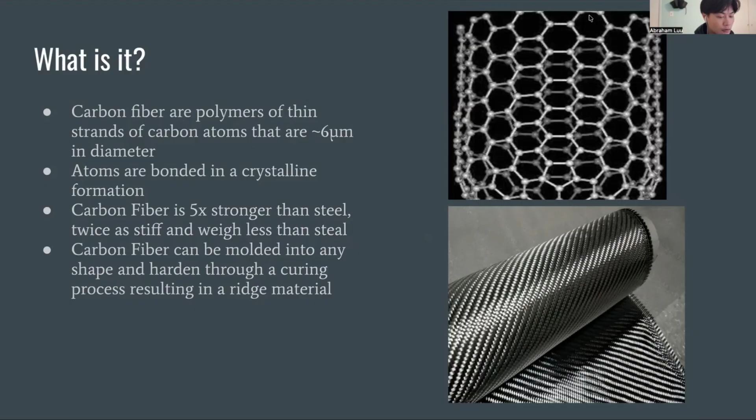Carbon fiber can be molded into any shape and can be hardened through a process called curing, resulting in a lightweight, rigid material. Additionally, carbon fiber undergoes additional treatments for specific requirements that can be combined with other hybrid composites that can form the durable materials that we know carbon fiber to be, especially for aircraft and other specialized industries.

The history of carbon fiber. In the 1800s, Joseph Swan would produce carbon fiber for the first time to be used in a light bulb. Thomas Edison would later adapt this technique in the incandescent light bulb by heating cottons or bamboo at high temperatures and carbonizing them into carbon fiber filaments.

In 1958, Roger Bacon would create a high-performance carbon fiber at Union Carbide by heating strands of rayon until they are carbonized. However, this process would soon be inefficient as the fibers only contain 20% of carbon. However, this would cause Dr. Akio Shindo in 1960 at the Agency of Industrial Science and Technology of Japan, using polyacrylonitrile or PAN, that his fibers would contain only 55% of carbon.

This would later be improved by Richard Millington of H.I. Thompson Fiberglass Co., and he would produce a 90% carbon fiber using rayon as a precursor with PAN fibers. These fibers are later used for our aircraft and vehicles and other industrial usages. In the 2000s, newer carbon fibers would contain 95% of carbon with an increased tensile strength and elasticity. Modern carbon fibers are mass-produced and are used for industrialization for their lightweight, durability, and strength, known to be stronger than steel.

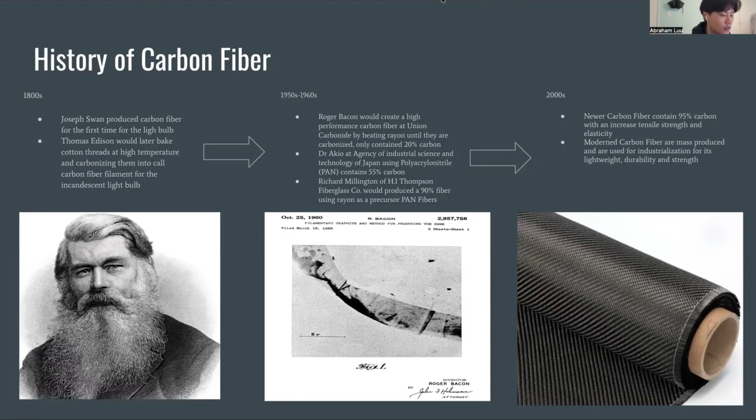Carbon fiber is produced by processing organic polymer raw materials known as precursors. There are mainly two types of precursors, PAN and petroleum pitch. There are other types of precursors like rayon, which was used in the earlier days. PAN-based carbon fiber is manufactured through five main steps: polymerization, spinning, thermal stabilization, carbonization, and surface treatment.

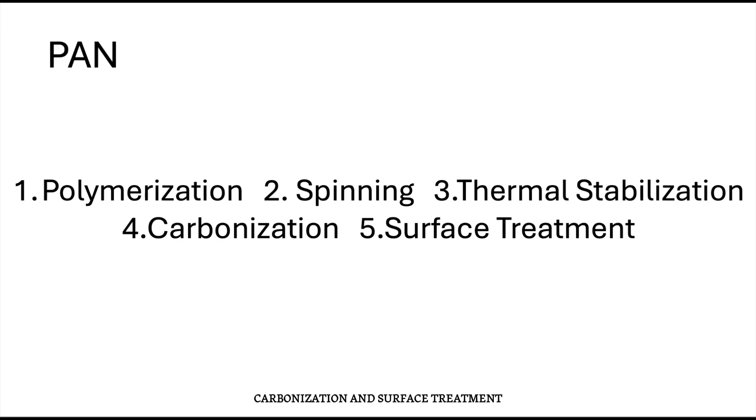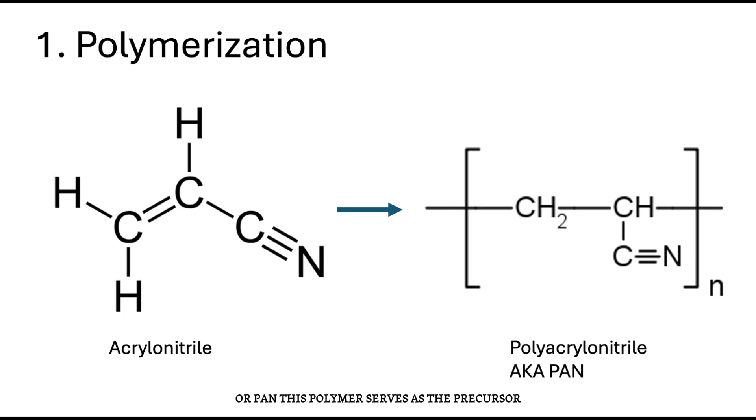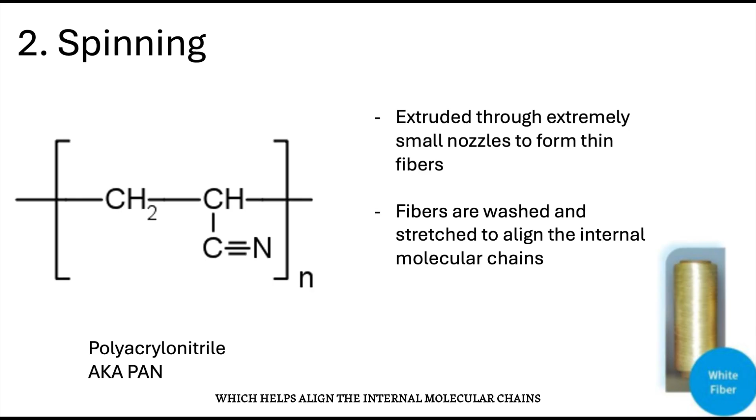First, acrylonitrile is mixed with the catalyst to produce a polymer called polyacrylonitrile, or PAN. This polymer serves as the precursor for the carbon fiber. Next is the spinning process. The polymer is extruded through extremely small nozzles to form thin fibers. Wet spinning is the most commonly used method. During this stage, the fibers are washed and stretched, which helps align the internal molecular chains and achieve the desired fiber diameter.

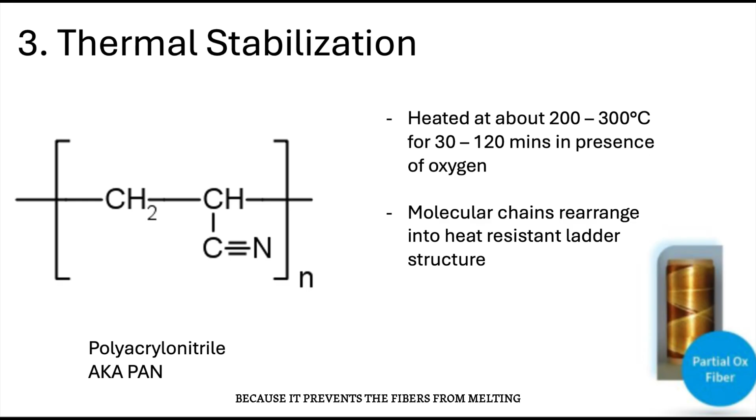The fibers then undergo thermal stabilization. They are heated at about 200 to 300 degrees Celsius for 30 to 120 minutes in the presence of oxygen. During this process, oxygen is absorbed and the linear molecular chains rearrange into a heat-resistant ladder structure. This step is important because it prevents the fibers from melting during the next high-temperature stage.

After stabilization, the fibers go through carbonization. They are heated to very high temperatures, typically between 1,000 and 3,000 degrees Celsius, in a nitrogen atmosphere. During this process, non-carbon atoms such as hydrogen, oxygen, and nitrogen are released as gases, leaving mostly carbon atoms behind. These remaining carbon atoms then bond together and form a crystalline structure that aligns parallel to the fiber axis. This alignment gives carbon fiber its high strength and stiffness.

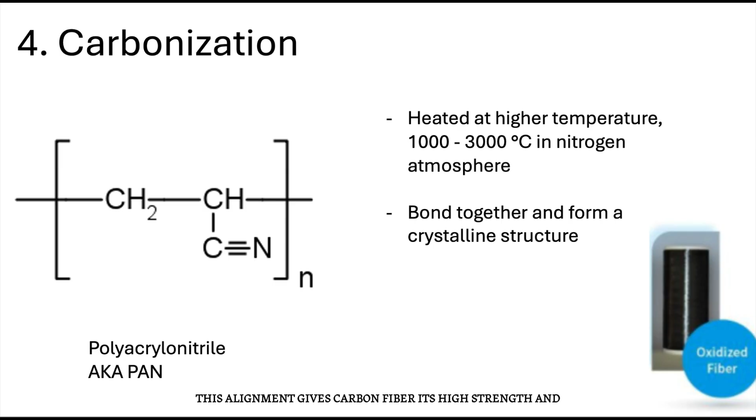Finally, the surface of the carbonized fibers is slightly oxidized to increase surface roughness and chemical reactivity. This improves the adhesion between the carbon fiber and resins such as epoxy when the fibers are used in composite materials.

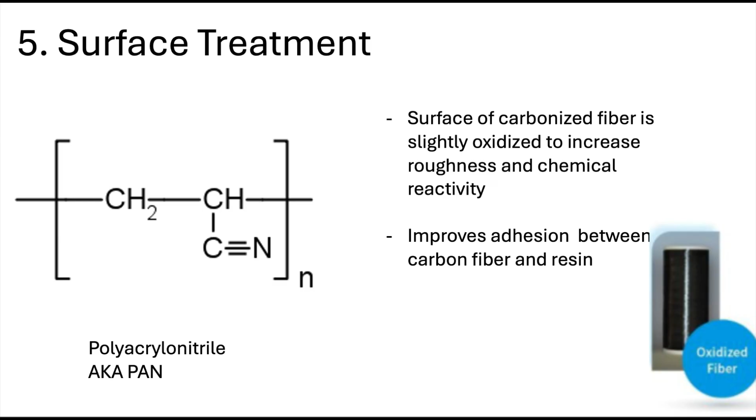Manufacturing pitch-based carbon fiber follows a slightly different process. It follows 5 main steps including pitch preparation, melt spinning, oxidative stabilization, carbonization, and surface treatment. Pitch-based carbon fiber production begins with the removal of impurities. Pitch, which is derived from petroleum or coal tar, contains solid particles and gel-like impurities. These impurities must be removed because they can reduce the tensile strength of the final carbon fiber.

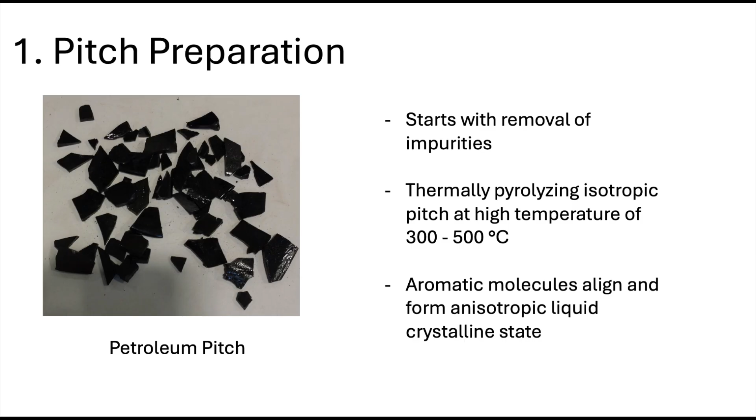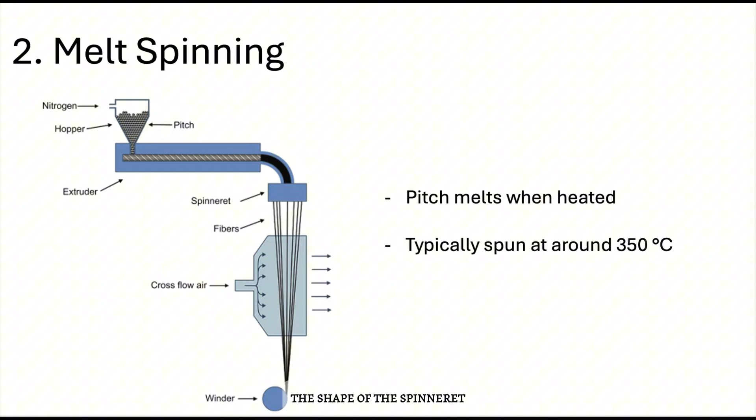After pitch is prepared, it goes through the spinning process. Since pitch melts when heated, melt spinning is used to form fibers. For mesophase pitch, fibers are typically spun continuously at around 350 degrees Celsius. The shape of the spinneret holes can also be adjusted to control the cross-sectional shapes of the fiber.

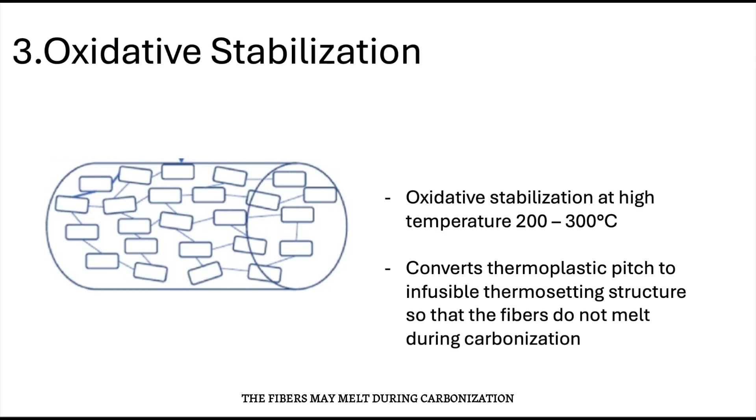Next, the fibers undergo oxidative stabilization at around 200 to 300 degrees Celsius. This step converts the thermoplastic pitch into an infusible thermosetting structure so that the fibers do not melt during carbonization. If stabilization is insufficient, the fibers may melt during carbonization, while excessive stabilization can degrade mechanical properties.

Pitch-based fibers have very high carbon yield, about 80%, which is higher than PAN or rayon precursors. The carbonization step, however, follows the similar carbonization step used for PAN precursor. It is heated at higher temperature at around 1,000 to 3,000 degrees Celsius in nitrogen atmosphere. In addition, pitch molecules naturally align along the fiber axes during spinning, allowing high performance to be achieved during carbonization without applying large tensile stress.

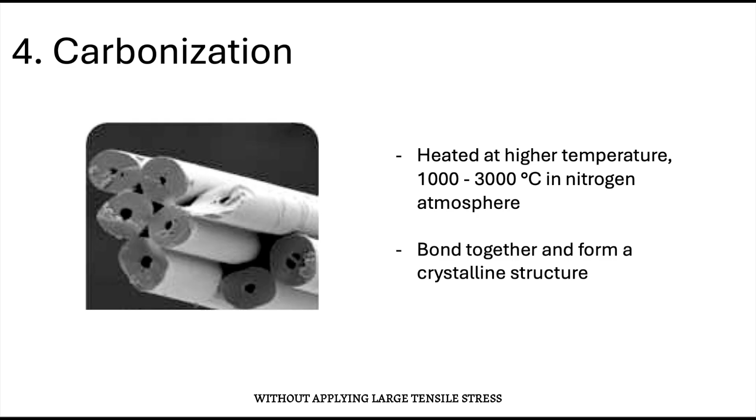Finally, after carbonization, the fiber surface is oxidized to increase surface roughness and chemical reactivity. The fibers are then coated with a protective sizing layer and wound onto cylinders called bobbins.

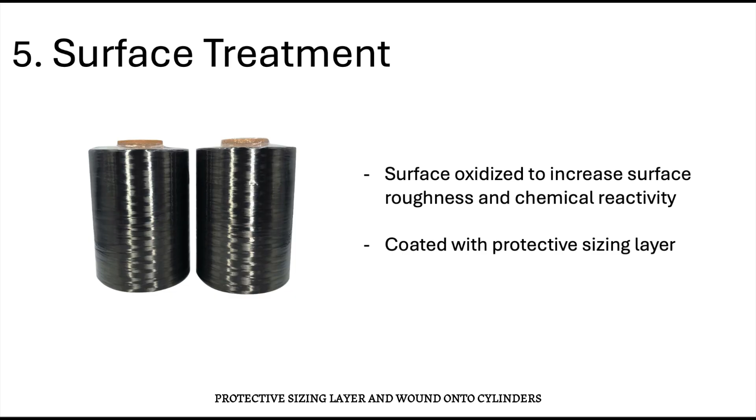What is carbon fiber used for? Before we talk about its applications, let's first talk about why carbon fiber is used. First off, carbon fiber is extremely strong, being 5 times stronger and 2 times stiffer than steel. It is also extremely lightweight, making it have one of the greatest strength to weight ratios of any material. Additionally, carbon fiber is resistant to corrosion and has very high stiffness, meaning it does not easily bend or deform. Because of these properties, engineers use carbon fiber when they need materials that are both strong and light.

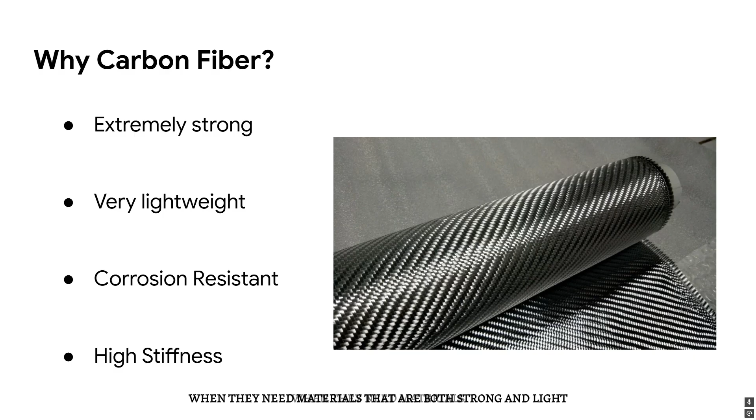Now let's move on to some of the applications of carbon fiber. First, we have aerospace applications. Modern aircraft use carbon fiber composites in the fuselage, wings, tail, control surfaces, and interior and structural components. In modern aircraft like the Boeing 787 and Airbus A350, carbon fiber makes up 50% of the airframe.

This is because carbon fiber is much lighter than traditional metals like aluminum and steel. It reduces the overall weight of the aircraft. A lighter aircraft uses less fuel, which improves efficiency and lowers costs.

And that is why that darn plane ticket was so expensive.

Another advantage is that carbon fiber has great fatigue resistance, meaning that it is much more resistant to weakening over time, which increases the lifespan of aerospace components.

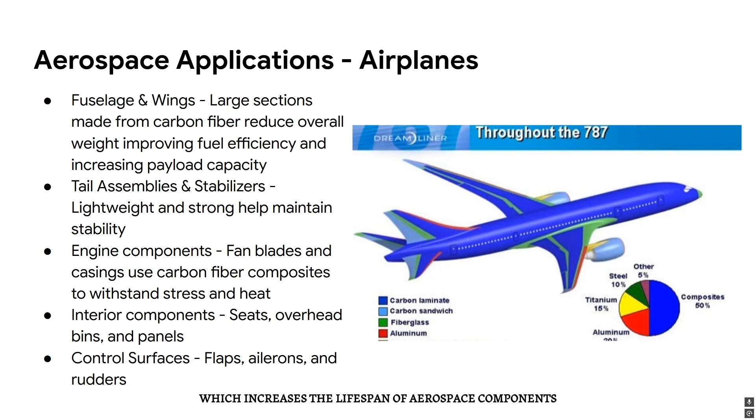Carbon fiber has also become one of the most important materials in modern sports equipment. This is because it provides a combination of high strength, low weight, and high stiffness. These properties allow athletes to generate more power and control while using lighter equipment. For example, tennis rackets made from carbon fiber are very stiff, which means they bend less during impact with the ball. Because of this, more of the player's swing energy is transferred directly into the shot, increasing both power and accuracy.

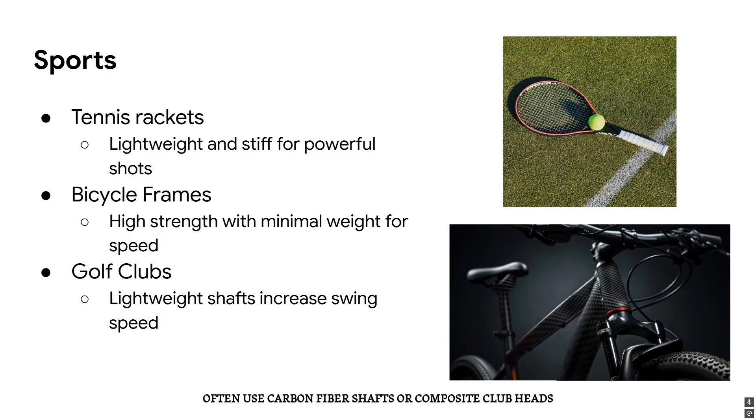In bicycle frames, carbon fiber is used because it is extremely strong but significantly lighter than metals like steel or aluminum. This reduces the overall weight of the bike, which improves acceleration, climbing efficiency, and overall speed. Finally, golf clubs, particularly drivers, often use carbon fiber shafts or composite club heads. The reduced weight allows golfers to swing faster, which can increase the distance the ball travels.

Carbon fiber is also widely used in the automotive industry, especially in high performance and racing vehicles, where reducing weight while maintaining strength is critical. One example is Formula One racing cars. The main structure of an F1 car is called a monocoque chassis, which is made almost entirely from carbon fiber reinforced composites. This structure acts as a protective shell around the driver. Despite being extremely lightweight, it is incredibly strong and designed to absorb large amounts of energy during a crash, helping to protect the driver.

Carbon fiber is also commonly used in supercar body panels, such as those found in sports cars. Because carbon fiber is much lighter than steel or aluminum, it reduces the overall mass of the vehicle. Lower vehicle weight improves acceleration, braking, and fuel efficiency. Another advantage of carbon fiber in cars is its high stiffness. Stiffer materials reduce flexing in the chassis and suspension components, which improves handling and vehicle stability, especially at high speeds.

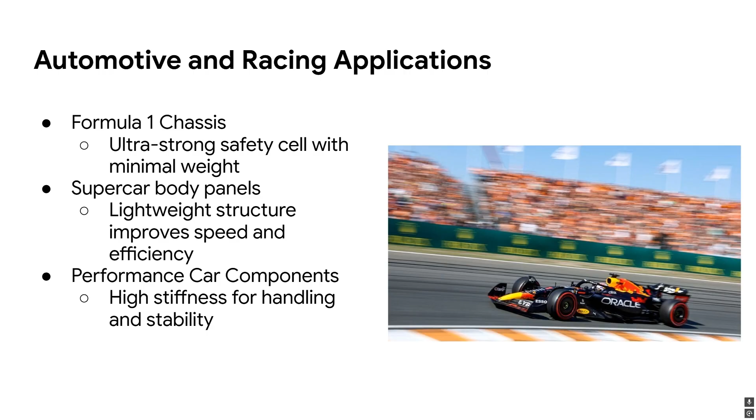Carbon fiber also has applications in medicine. One of the most important applications is orthopedic and spinal implants. Carbon fiber is strong, lightweight, and radiolucent, which means it doesn't block X-rays or CT scans. This allows doctors to monitor bone healing, spinal alignment, and post-operative recovery more clearly. Another key advantage is that carbon fiber has a stiffness similar to natural bone, which reduces stress differences between the implant and the body. This helps prevent bone weakening and makes the implants work more naturally with the patient's skeleton.

It is also used in prosthetics. The low weight and high strength of carbon fiber makes prosthetic limbs more comfortable and natural to use. Amputees can move faster, perform daily tasks more easily, and experience less fatigue, improving their overall quality of life. In radiology equipment, carbon fiber is widely used for frames, supports, and imaging tables. Because it's X-ray friendly, it doesn't interfere with scans, allowing for clearer images and more accurate diagnoses.